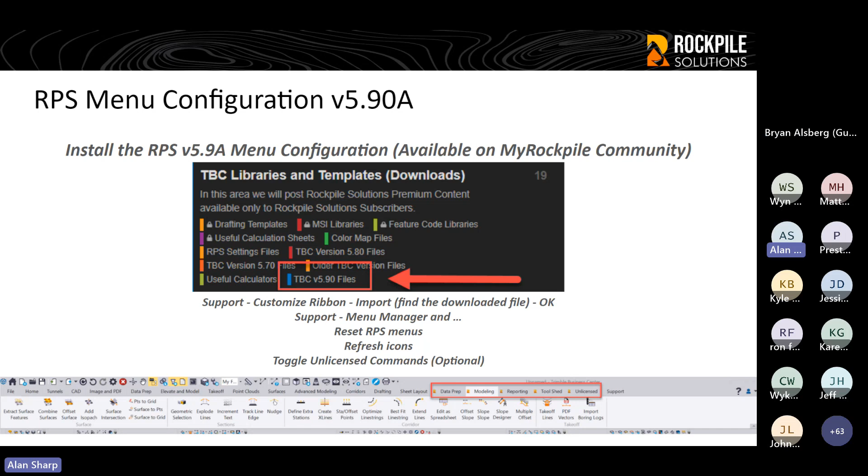So macro commands 3 folder structure, we talked about it a little bit earlier on. To solve the administrative rights issue, we created our folder structure as follows: you've got the macro commands 3 folder, then underneath that you'll find Rockpile Solutions and Trimble. And in the Rockpile Solutions folder, you'll find some system level command stuff, which is our Rockpile custom controls and utilities and shim and stuff like that, which are things that we use to control a lot of our things like our new layer control or our show direction control.

They're all centrally managed, and then all commands have access to those. So the things you find in that root folder for Rockpile Solutions are those kind of things. And in the commands folder, you'll find every single command in our library, and that's where all the TMLs are stored.

Any unlicensed commands shipped with Trimble product are in the Trimble folder. There's about 8 commands in that folder which ship out with Trimble 5.9, and we have absolutely nothing to do with that folder anymore. We've kept all of our stuff out of there.

As part of this release, we've done a bit of refactoring of naming of commands to make sure it's clearer that there are commands. We've made sure that icons, help, and support are all linked to the right command names. So there's been quite a lot of cleanup done in this process to get more consistency into our package, which sets us up for the future.

So macro commands that RPS develops and supports are in the Rockpile Solutions folder. If Trimble isn't shipping a version of a command, the command will be in our folder. If Trimble decides to ship a version of the command, then we make a Rockpile version of that, which has all our benefits on it. We make it separate to Trimble, and we'll continue to support our version, but we'll no longer support the Trimble version when Trimble decides to ship it with the product. We can't control what they do on that side at all, so we're letting them take care of that piece of it as they need to.

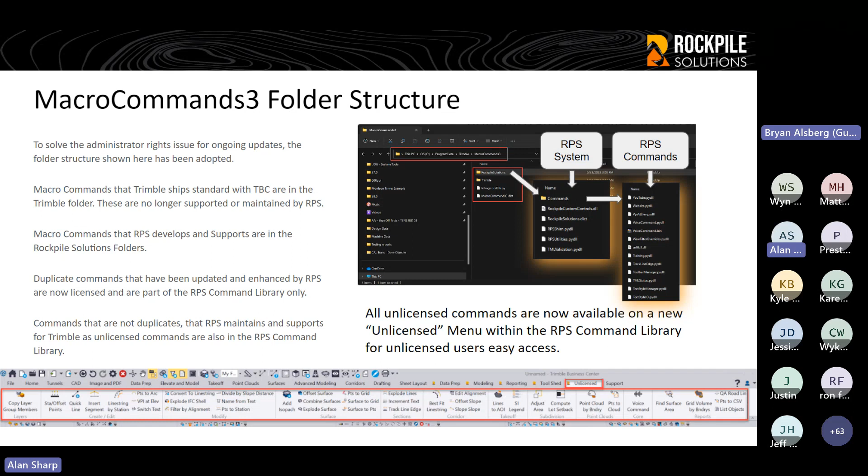So, RPS menu configuration for TBC 5.9, updated commands. We updated all the commands on the menus. We further reduced duplication of commands on different menus to make the workflows a little clearer. We've restructured the menus for some improved workflows and process steps, and we've integrated all of the new RPS and new Trimble commands into those menus.

RPS menus are now on 4 menus, plus the unlicensed commands for unlicensed users. We have a reporting menu for drafting, reporting, and exports, which is nice because now you go to that tab for that process step in the process. And toolshed is now really system tools, special applications like point piling, point clouds, etc. This reorganization gives us a decent amount of room for future development and adding more commands, which you'll start to see shortly. We've got a whole bunch of commands in the pipeline that will be released over the next 6 to 8 weeks.

We have a real continued focus on main construction workflow process steps. So we're still pushing along this image and PDF, data prep, elevate and model, takeoff, reports and drafting kind of process that is really helping people to learn how to use TBC to get takeoffs and data prep done. The market is really growing on the estimating side, especially for us, and we're finding that more and more companies are adopting TBC as a result of this change we've been making, which is helping people learn and get up to speed quicker.

We still continue to focus on this left to right process, so left to right for menus and left to right within a menu, to make it easy for people to understand that I start over here and move to the right. That's how I understand which commands I should be using when I'm doing it. And that's now supplemented with the header bar commands, which say, when I'm running this command, what else might I want to use? So if you're running a command, the header commands will give you an idea of what other things you might want to do if you're in a specific type of process.

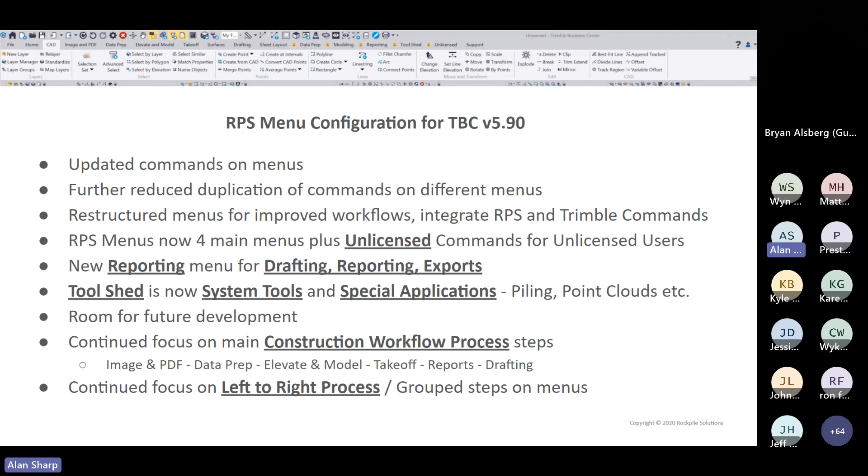So if you're running a command, in this case we're showing the define extra stations command, you may need other commands to do it. Things like creating an alignment, editing alignment labels, building a corridor, those kind of commands are all things you're likely to want to do if you're going to use the define extra stations command. So we put them in the header.

Within the commands, we've continued to rationalize the show direction and the highlighting of things. So if you're making selections, the highlights will be improved. You've always got the F1 key to access help, and you've always got the command tips at the bottom of the screen. In there, you always have a help tip as the first one, so F1 or click here to get command help.

If there's anything that might be useful to you while you're in this command, like if you hit V for vector snaps on and off, or you hit N for new line in some commands, anything like hotkeys and little tips will be put into those command tips area to help you get a bit of quick support. But if you want detailed support, press one of the help methods, the question mark, the F1 key, or the blue text at the bottom of the screen, and that will take you to the help page on our community. There you'll find full documentation and a video of the command in use, so you can actually learn how to use it. All these things have been changed, and every single command that has a command pane dialog will now have that structure.

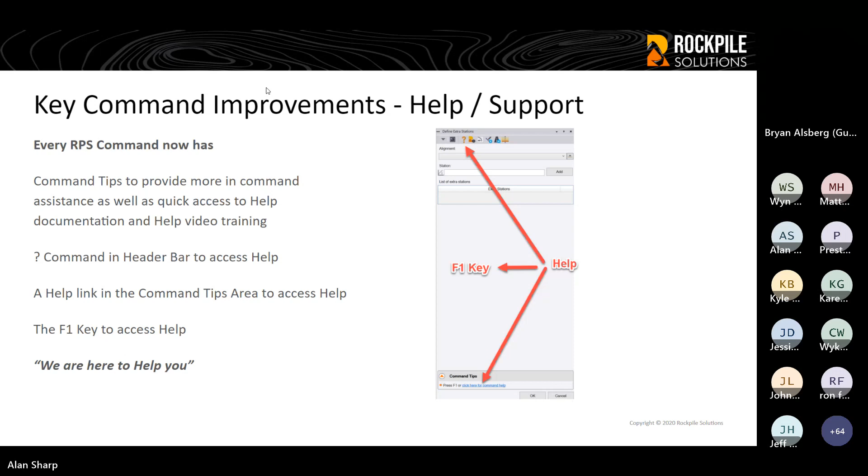As I say, our experience isn't the same as yours. So you may find that it would be nice if you could add a command, like project cleanup, to the header, because you're always having to find that command. So just let us know.

It's easy for me now to go in and change a spreadsheet, and when we build the software next time, that spreadsheet drives what goes into the headers. Peter's been building a methodology so it's really easy for us to change the header bar commands and update them when we build a new version for a release. So this is a big improvement.

While we say we're using a spreadsheet, that's just how I log in and put the data in. Peter just reads that spreadsheet per command and loads the header commands into the code automatically. So it's easy for me to manage for you, and Peter can build the library of commands very quickly as a result. It's a nice change.

This is one of the things that differentiates what we're doing compared to anybody else writing TMLs out there, is that we're trying to build a commercial system that allows us to build product quickly, manage it properly, and give you tested, documented, QA'd commands that we know work in both versions of TBC. It's hard to do this kind of work, and you need system level programmers like Peter and Wyn on my team to take care of it. The guys are doing a phenomenal job.

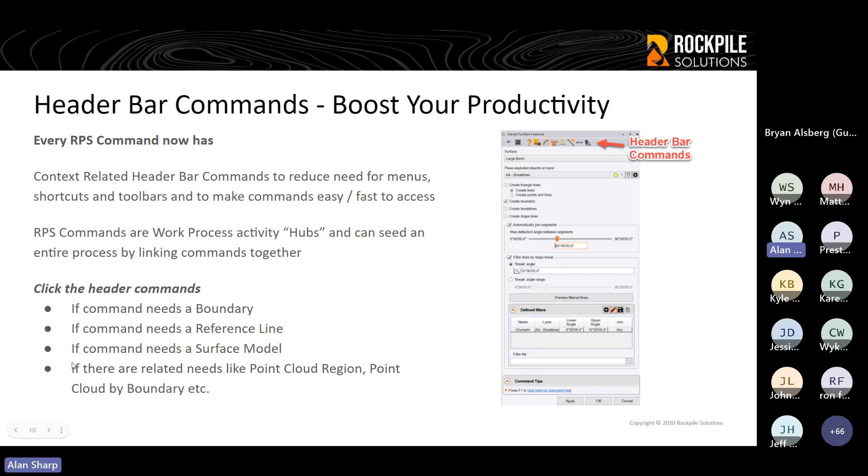Command enhancements. So we've made a lot of changes to commands while we've been doing open heart surgery on all of them.

In the past, we had a lot of early commands that were TMLs written by Trimble that weren't necessarily used so heavily, but when you try to use them, they execute once and close. A good example is the point cloud by boundary command. You might have a site limits boundary and two exclusion areas in the model, and you had to run the command three times to get it to do what you wanted.

Now we've made it so it only runs once and stays open until you close it. That just means you can do everything you want before you close it, and there were quite a few commands like that. So we changed all of them to execute and stay open, and then you close them when you're done, as opposed to execute and close, execute and close, execute and close, which is what was happening with a few of the commands before. Simple changes like that just make your life easier.

Command dialogues have been restructured for improved workflow and consistency. We found inconsistencies in the way we said things. There were some command dialogues that weren't laid out quite right, and some where the flow just wasn't right.

A good example is radial points. If you create polar rectangular coordinates, you'd click on a location - that was the first thing it asked you for, where do you want to put this. As soon as you clicked on that, if you'd already set up the settings, it would just drop it on the screen. That was too early, because you had to put in the settings afterwards. So we reorganized it so it now flows from top to bottom, and when you get to the bottom it creates the object and moves back up in the list to where it needs to be for the next round of placement. The flow just works a lot better.

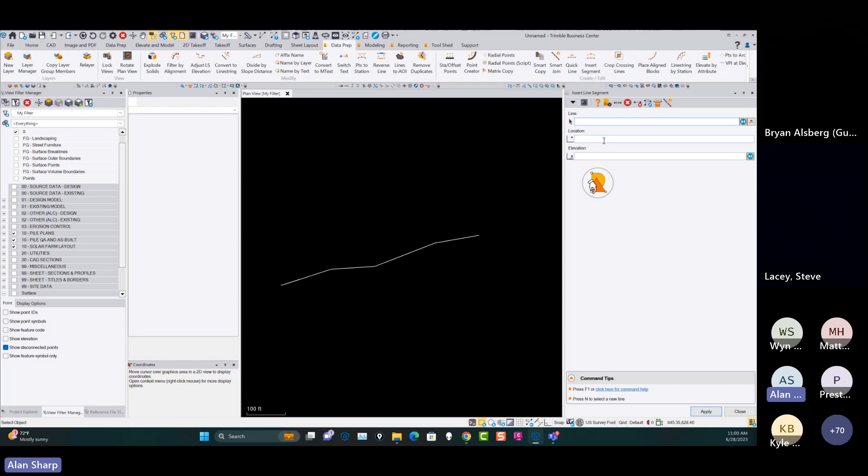If you want to go in and add segments to this line, you can grab the line itself, and when you do that, you can add segments to the end, add segments to the other end, or go in here and add segments in the middle of a segment. And if you make a mistake, you can go to rock grips, grab those, move them into position, and then go back into editing.

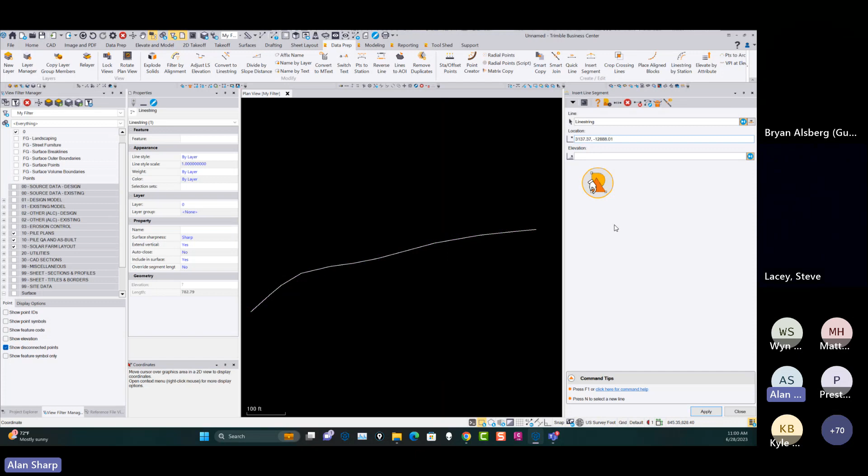So this is like turning this in, but now if I want to break that line, I can hit break, go here, close that command, and I'm back to inserting line segment on this one right here. I can just start clicking and carry on. So the beauty of these is that it's not another command on a different menu - these things you hook up, the line is carried into the command that's being executed.

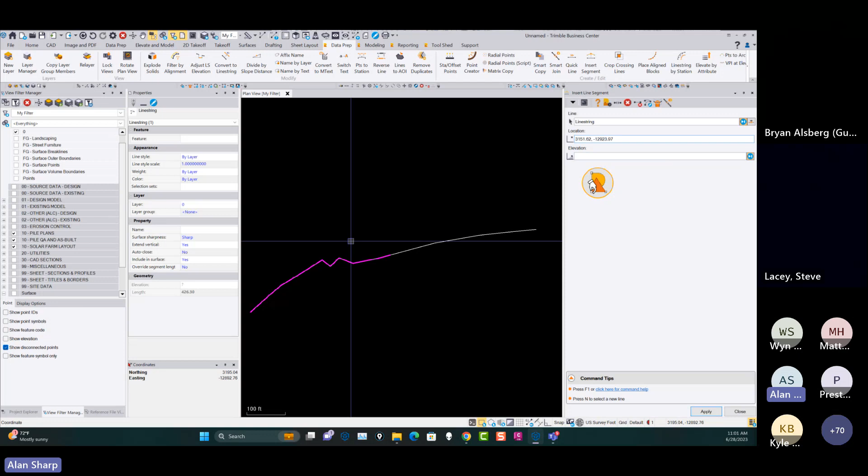You can make the change, and then come back and carry on, or you can jump into rock grips and start editing and modifying the line as you see fit to get it to match up. When you're digitizing, it's inevitable that you'll make mistakes, but these kinds of tools allow you to really fix up line work quickly, just by using simple commands in here without having to close the command just to get to the grips to move things, then come back into the command to continue what you were doing.

So this is where the header bar commands really come into fruition. If I go to things like station offset points, what else might you want to do while you're doing station offset points? You might want to offset a line, use multi-offset line, create points, create radial points, etc., because this is a point creating tool.

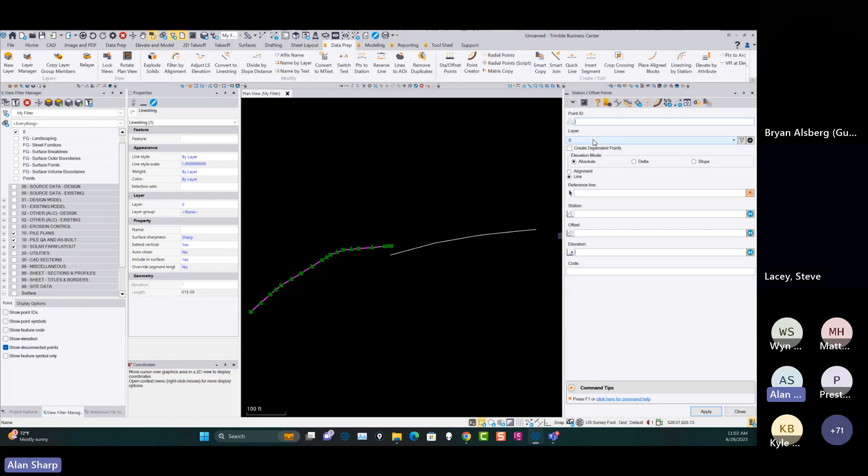So all the point creating tools are in the header bar here, which makes it easy to get access to them. So while it may look like a small change, this is where production really starts. You get the ability to jump around, jump to a command, and when you're done, close that command, you're back where you left off. You can then go into other functions if you need to, so one point creation function gives you access to all of the other point creation functions you might need.

When you do things like point cloud processor - if I go to the toolshed menu and pick up point cloud processor and run that command - the header bar commands give you things you might need, like drawing a boundary so you can add an inclusion or exclusion area. So you've got the takeoff lines and the boundary function here. You might need to sample region, so you can use the sample point cloud region function. You might need to create a point cloud boundary, so you can run the point cloud boundary. If you want to add a region or create to a region, you can do that. If you want to use keep in and keep out, or add contours, you can do all of that too.

So everything is within this command and within the header, so that while I'm doing this, if there's something I need to do, I can execute it from here and then come back and carry on, rather than going - okay, which menu is that on? I go over here and change that, then come back over here to this menu. It saves you a lot of time and effort just by knowing that the header commands are context related and they should all be in the header bar.

As I say, if you find that every time you run this command and you look up here for a command and it's not there, and you feel like it should be, just let us know, because it takes me 2 minutes to add it to the spreadsheet. That means next time we build that command, that header bar could be improved or added to as you see fit. Now, we don't want to change the main structure of this, but if somebody says, I never use that one, can we take it away? We might do a poll on that and see whether that's true, or decide whether we think you're right or wrong. But if you say, let's add something to that menu - as long as we're not going to stretch this to 100 commands and everything becomes a menu, try to limit this to less than 10 commands, because too many makes it too difficult. But 10 commands or less that are context related is something we think is extremely usable.

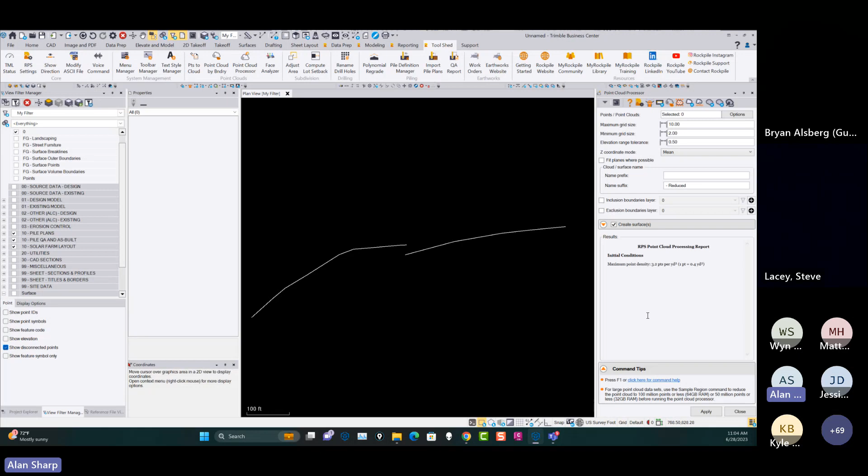So what else has changed within here? We talked about highlighting and things like that. Let me just start a new project here a minute, and I'm going to bring in something to show you crop crossing to give you an example of how highlighting has been improved.

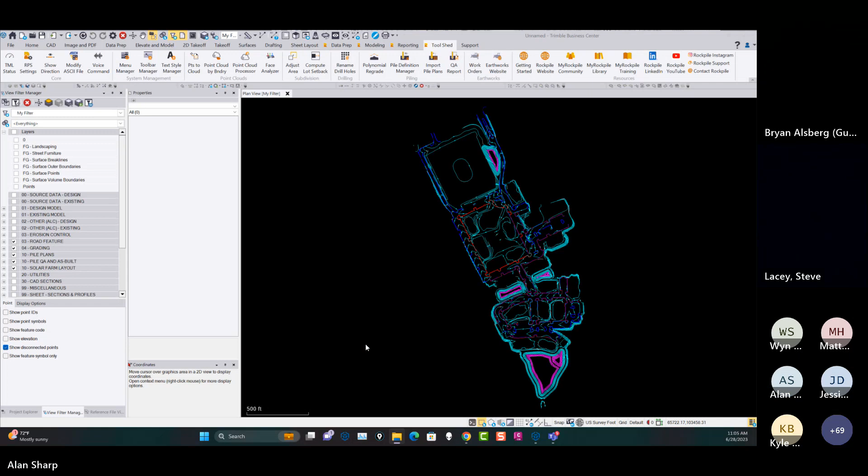So if I just go to... this will show both the improvements to crop crossing, but also how highlighting has been improved here. So within this is an example of a job where you've got lots of curb and gutter lines, and you've got contours, and you want to crop the contours between the two lines.

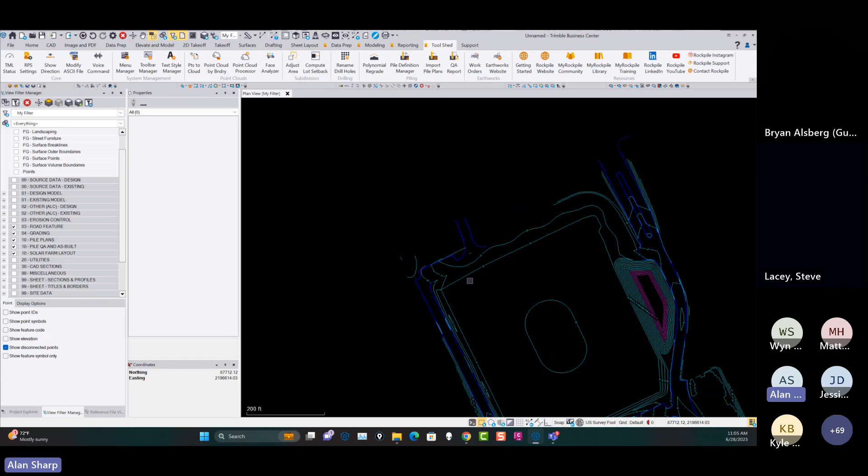When we first wrote this command, the two-line mode worked maybe a little bit better than it has been more recently. I'm not sure when it got changed and why. But when we started looking into it, the code just wouldn't have done things correctly, especially with things like closed lines, or in this case, in this particular job. This is a data set I got from a customer, and he said it's absolutely horrible on this.

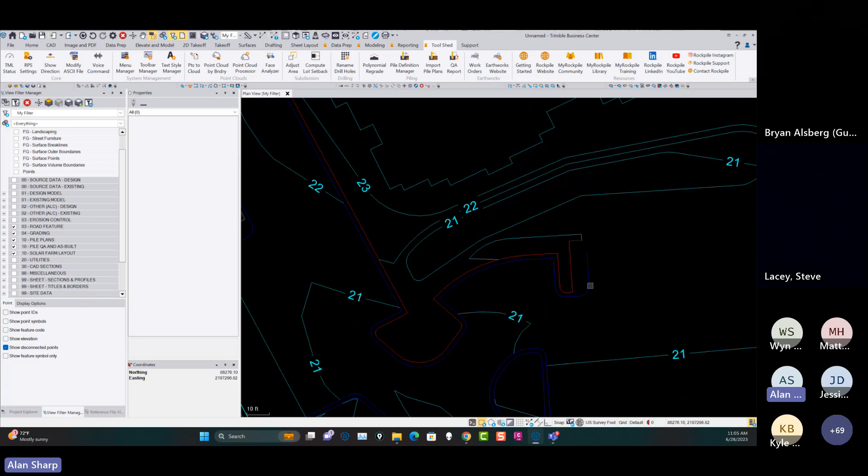You can see this line comes around, and then it's not parallel with this one, and it finishes beyond the end of this one, and it just didn't work at all in those situations. So they asked us to look at, could we rework it to make it, again, more usable?

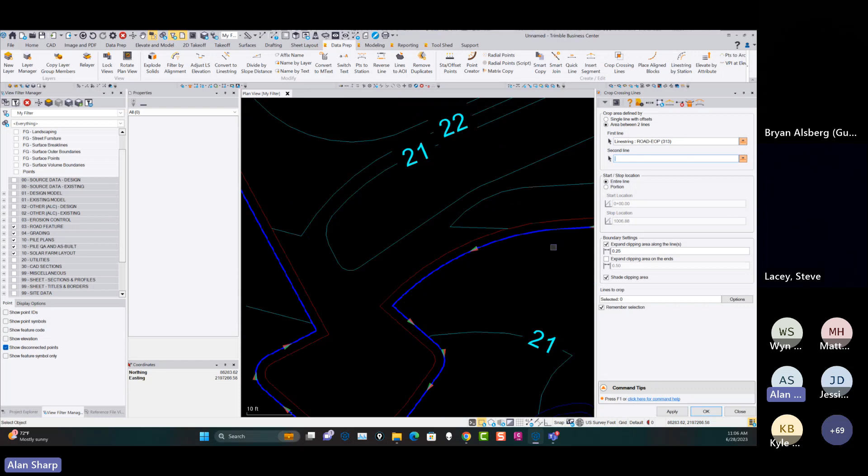So if you go to data prep now and you go to crop crossing, and if we pick some of these lines, we've made some improvements into the area between two lines mode. And in this case, I'm using the entire line. And so if I go in here and say, pick line 1, it highlights correctly. Pick line 2, it highlights. And then the secondary highlight is now used in between.

Now, the way we handle non-parallel lines is we look for the end of one line, look for the nearest end of the other line, and we close it out to make a closed area in that situation. And that applies on both ends here. In this case, this was a closed end. You can see it joins across the end here to give you a thing. But this point is right here.

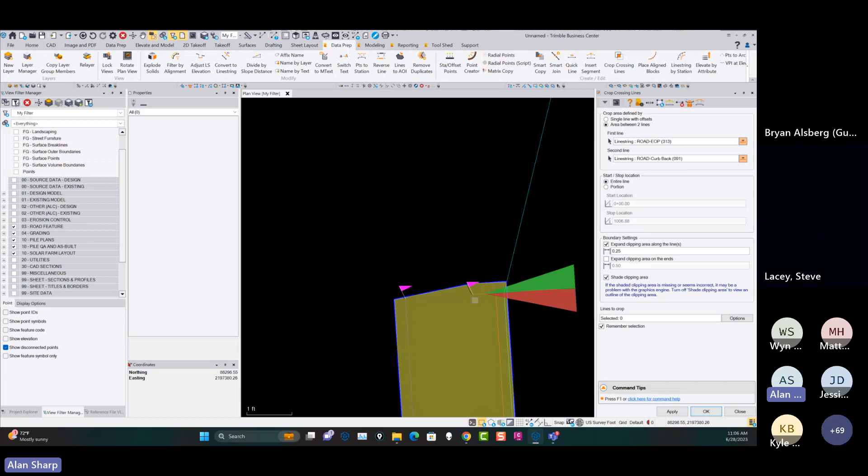We have this expansion area, which allows you to expand left and right of the selected lines so that you get a bigger clipping area. And then you can just go down here, pick the contours that you want to crop out by layer. So you just click on the layer that you want, close out, and now you hit apply. At that point, now it's cropped all those lines to that, and you're ready to go to the next one.

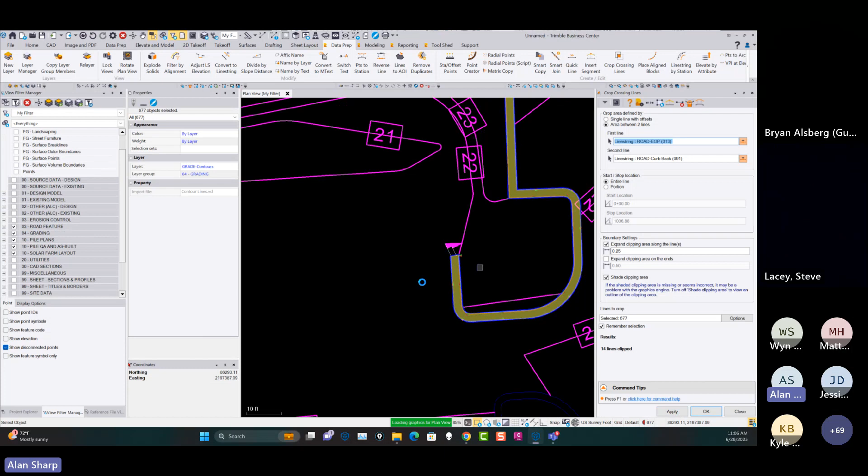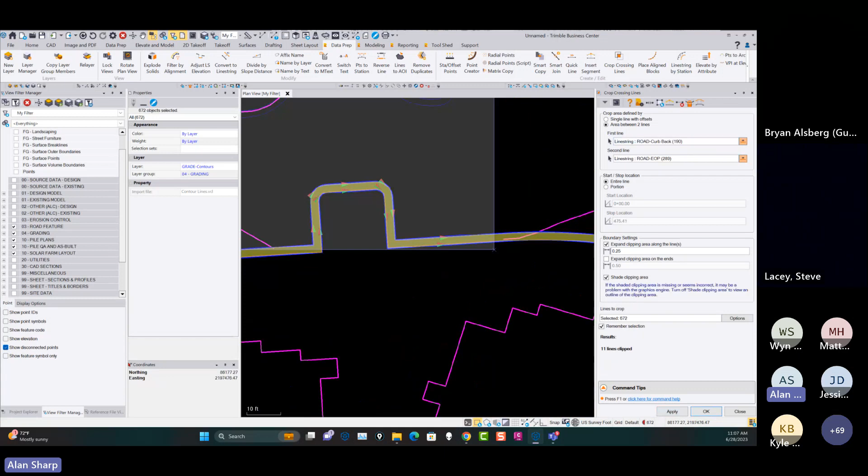So you pick line 1, line 2, and now it's ready to crop, and you hit apply, and then you go to the next one. And so this is a much faster workflow now than it was before. You just hit apply each time or enter, and now it's cropping the contours within those curb and gutter lines, and you can run through a data set much quicker now than you could before, and the highlighting is working much better as a result.

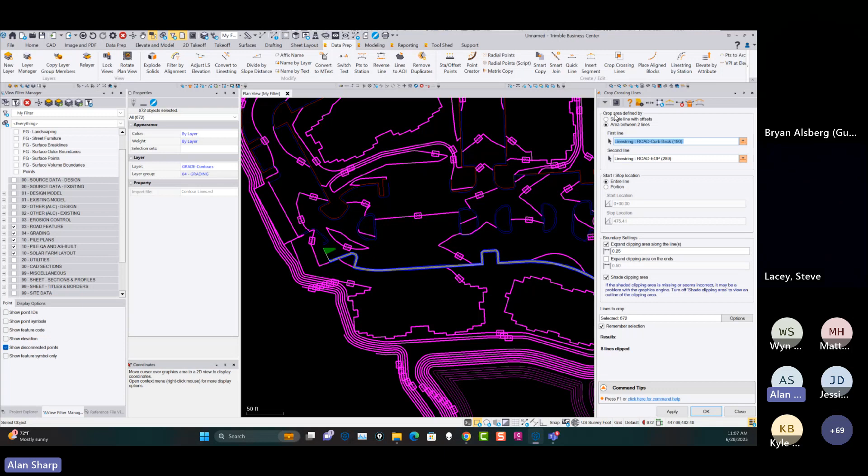So that kind of command, the highlighting is an important factor. The workflow within the dialog was improved and refined, and we fixed some issues with the two-line mode specifically. But if you're looking at like single line mode, and let's say we run that in portion mode, then this works in the same way.

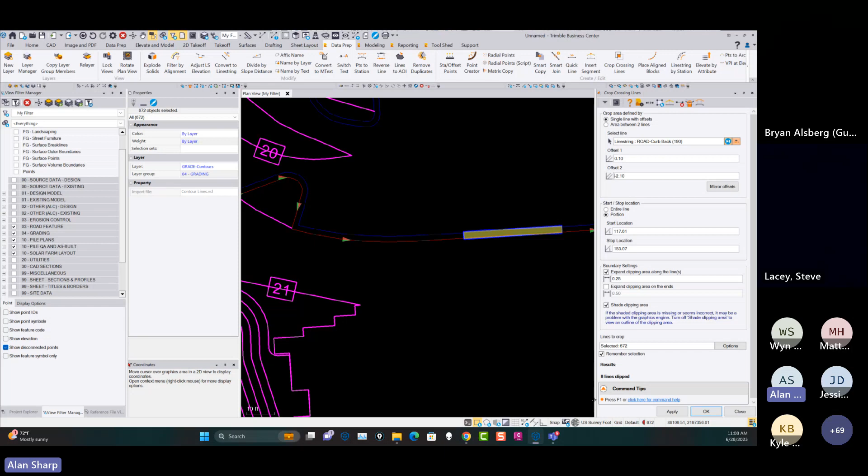So again, this just didn't work well from a highlighting perspective in the previous releases. Now it works a lot nicer, so you can see exactly what you're doing as you're working through the system. And again, you've got the header bar commands to jump to things you want, and you've got the help down here and the help up here, and you've got command tips that give you additional information should it be relevant. So just things like that make a massive difference to workflows.

If we look at things like slip form paving workflow, if I just start another new project here and take a look at that.

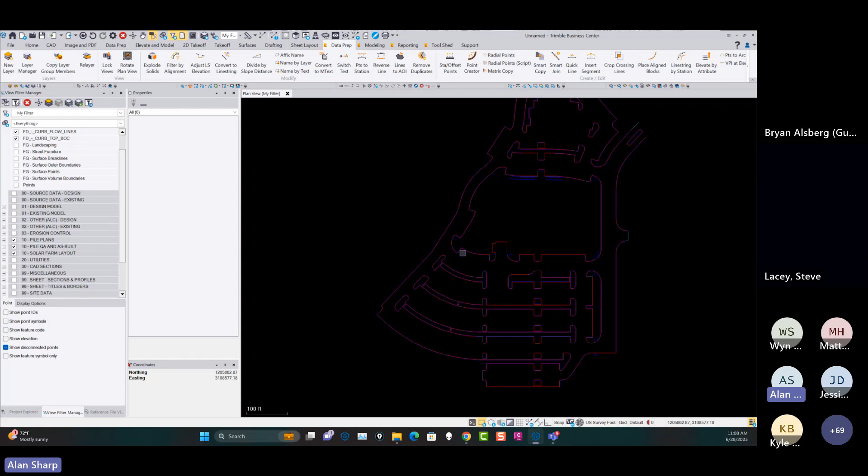If I go to slip form paving, I'm going to pick up a data set, which is the Trimble building that was built when I was there. Here we've got the parking lot information. So if I just pick the curb lines for this and isolate or view only that layer, I've got just that layer visible.

So our slip form paving workflow starts at the optimize line string function. If I go in here, optimize line string, now you'll see that in this workflow, in this command, the header bar commands...

Come on. Just give me a second here. For some reason, the server's taking a long time to respond.

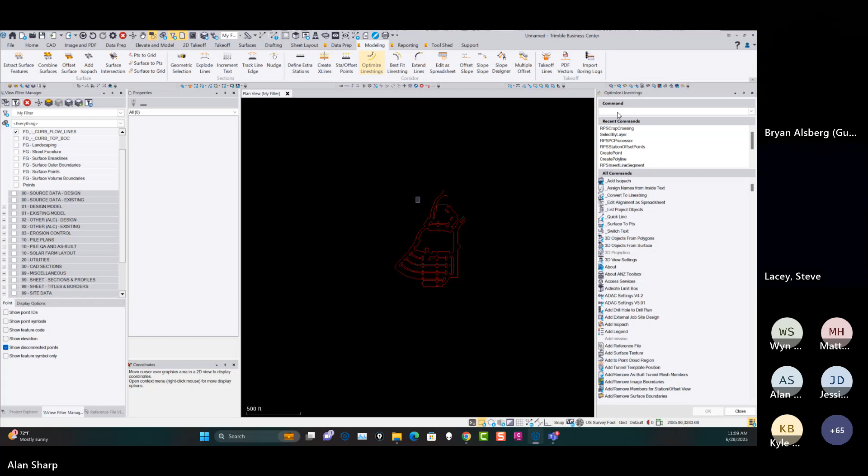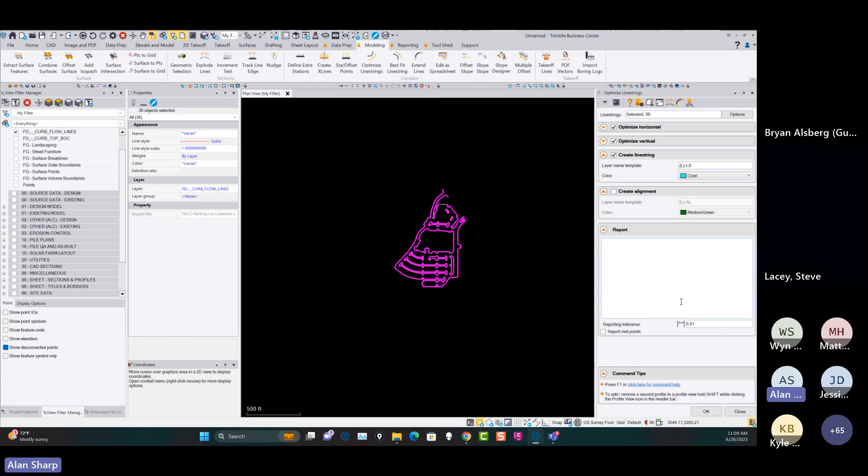There we go. Okay, so now if I go in here and I say, we start off with pick all the lines that we want to optimize, set our optimization parameters. These are now in RPS settings, so that you can now set these centrally and use them in all commands that need optimization. You can say I want to create line strings or alignments in the normal way, and then we can hit the OK button, and that will create me the layer of optimized lines.

So if I go into, once it's done this now, it's just finishing up here.

It's just taking more. Time for a new computer. No, something going on with the server on the back end, I think. I hope.

I'm just going to start another version of TBC just in case I need one. It's coming back now, I think. Here we go, it's come back now.

Okay, so now it created me these optimized lines on this layer, right? So I can turn off the original. These are the optimized lines. And so things like if I click on this line right here, let's just leave these two lines on a minute.

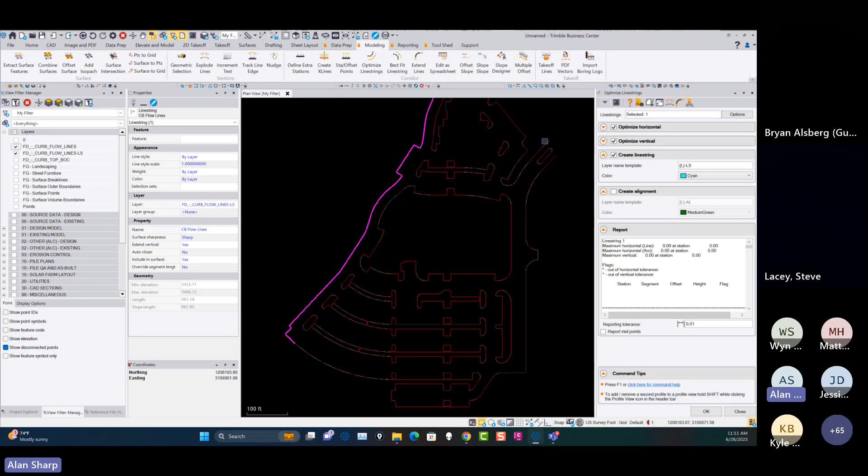If I click on the optimized line and I hit the profile viewer button, that lets me see the profile through that line. If I click on the unoptimized line and hold the shift key down and click on this button, now I can see the profiles of both lines at the same time. So here's the optimized line, here's the unoptimized line. You can see the difference it made all the way along the process.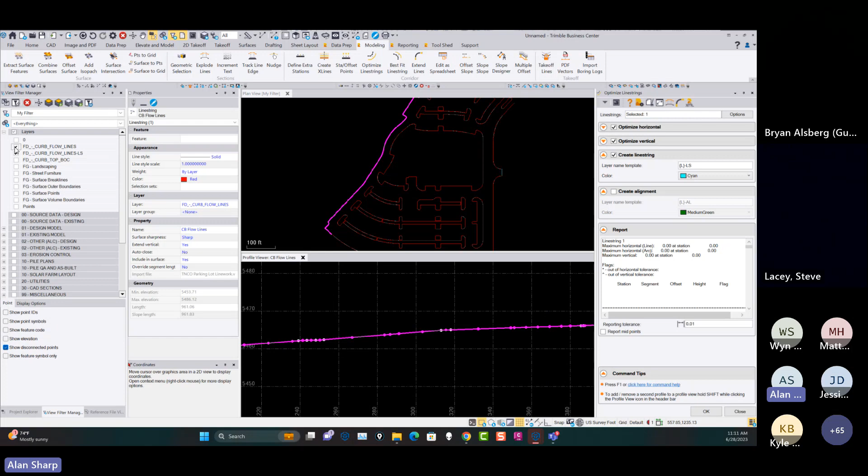So again, from the header bar commands, if there were duplicate lines, I could use the project cleanup to remove duplicates. If I want to go in and explode the lines, which is the next step in the workflow, I can turn off the source line, close out my profile viewer, and click on the next button in the process, which is explode. I can then say pick all these lines that I just created and explode them. And now they're all individual segments of lines.

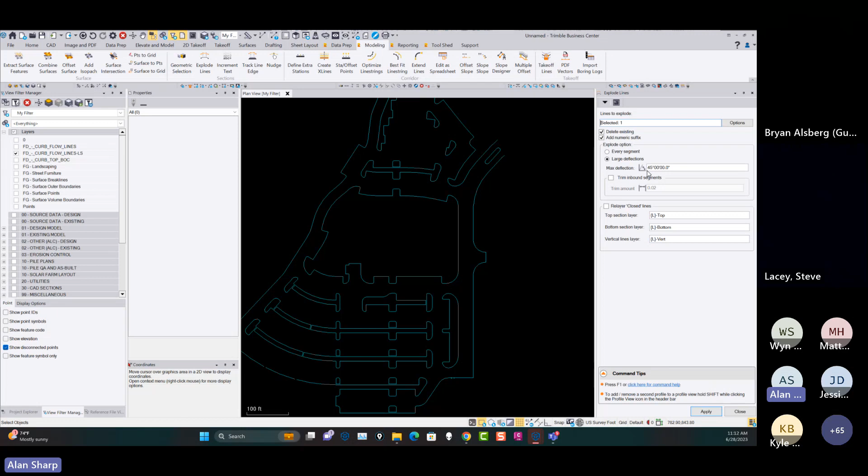You can see they're broken at all the right points for the paver. So now I've done the exploding. The next step of the line is to extend the line. So I can run extend. And now I can pick all the lines that I want to extend, set my parameters and hit apply. And now I've extended them.

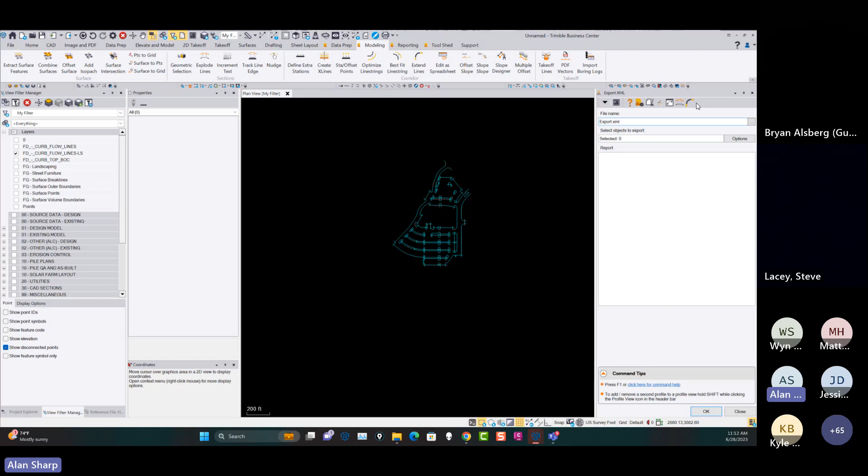The last process step is I want to go to XML. So the 4 commands all have the same headers in the same position. So when you move from step 1 to step 2 to step 3 to step 4, all you need to do is hit the next button in the sequence on the header bar to take you to that point. So now I can export them to XML, pick the lines in here.

And at that point, now I can say, okay, export those to XML, and they would go out to my XML file. So again, looking at the way the header bars integrate with the process, if you get the right header bar commands for the right command, then it's easy to move quickly through the process without having to remember that some of the buttons are on this menu and some of them are on this menu and some of them are on this menu over here. Now you just run step 1, 2, 3, 4 through the menu and you're done.

And if there's other things you need along the way, like project cleanup, then we put that on there too, so that it's easy for you to manage it. So that's like the header bar commands functionality in here.

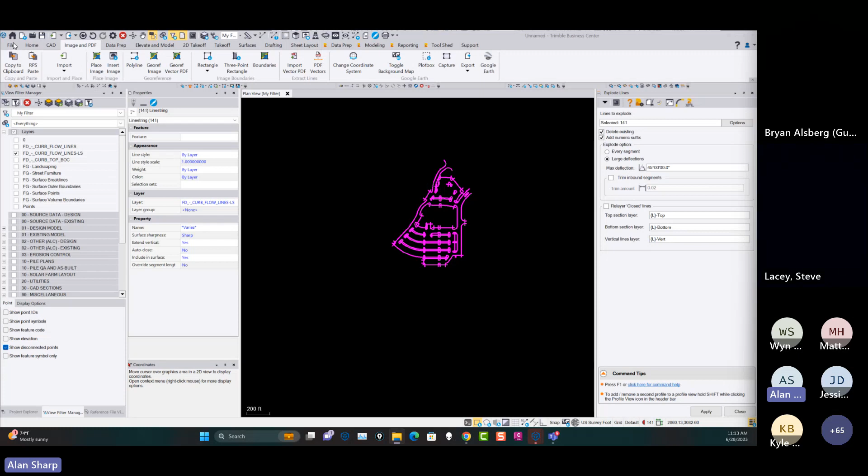If we do things like point cloud processor, just as another example, just to kind of show that. So if I go to File New here and say OK. And in here, if I bring in a point cloud file, this is a reservoir project here in Colorado. This is about 25 million points or something like that. So that takes a few seconds to load.

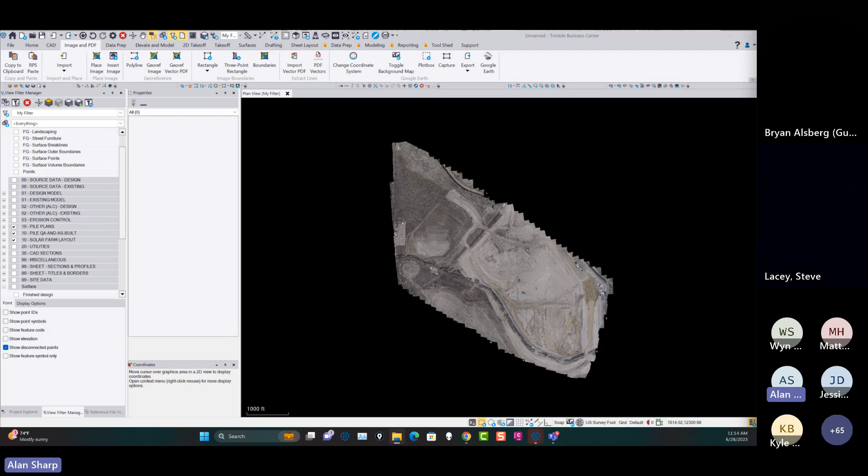Okay, so then if I bring in some exclusion areas in a site limits file. My green line around the outside is my site limits. The red areas could be exclusion areas for some reason. This is just a demonstration, it isn't real, but the purpose is to show you the way we're thinking here.

If you're in the Tool Shed menu and you run point cloud processor, if I needed to create those boundaries, the boundary and takeoff lines are up here in the header, so I can draw these while I'm in the command from these header bars.

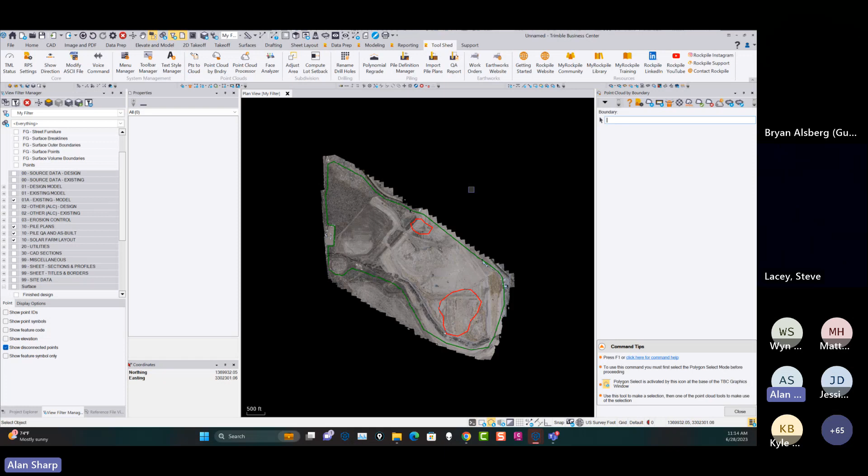If I need to use the point cloud by boundary command to limit the point cloud to just this area, I can run the point cloud by boundary command while I'm here, pick the limits boundary right here, and that will highlight the area of the data for that site limits.

And now what's the next step? I need to create a region. So I go to the create region command, which is back here, and I want to create this. It's called site limits, and say OK. And so now I've created my region directly while I'm in here.

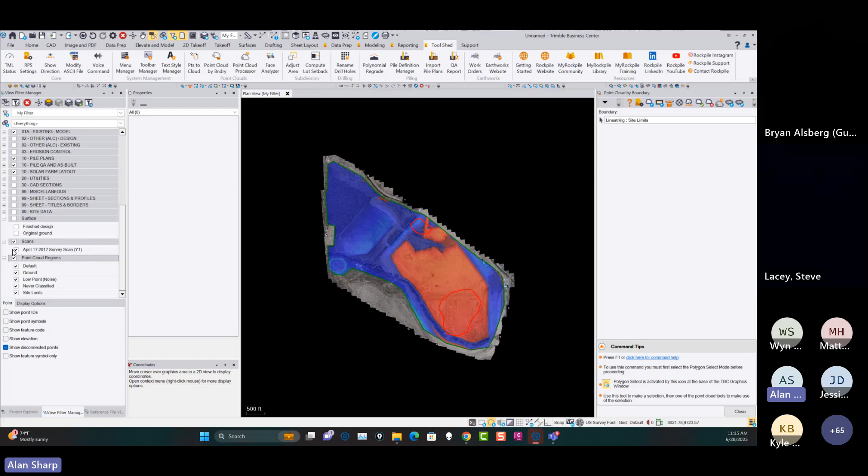So I can turn off in the point cloud regions, I can turn off everything apart from the site limits data. And that's now color coded it based on my elevation range for the job.

Now, if there's some other boundaries, the point cloud by boundary command is still running, whereas before it used to close. Now I can just say, okay, well, I want to exclude this area right here. And what do I want to do with that? Well, I want to create a region out of that.

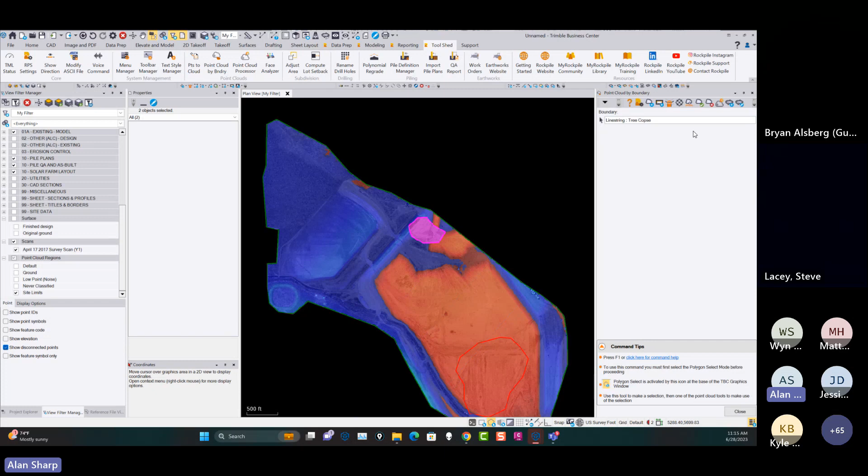So I'm going to say create a region, and I'm going to call it exclusions, and say okay. And now that's been put in the exclusions area, so I can turn the exclusions off, and that will be a hole in my model.

Same with this one over here. So again, I come back to here, click on this boundary, and I can then say that's now wetland areas, but I want to add it to a region. So I'm going to go add point region, and I'm going to set it to my exclusions area and say add. And so that point cloud data will now disappear.

Now I've got down to just the data I care about. The next thing I might want to do is, if I close out this one as well, I'm back in here. I can now say sample the point cloud region because I want to take this down from being, let's say...

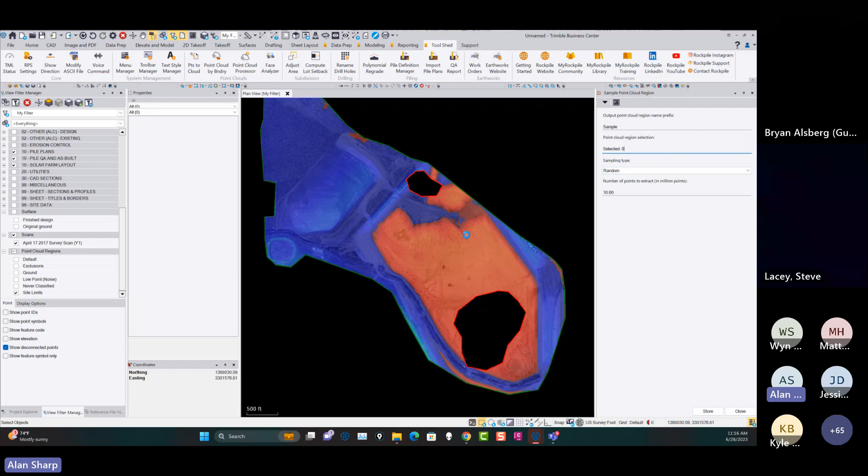I want to create an output called sample. I pick the point cloud that I want to sample, this one, and I say, well, I want 10 million points or 2 million points out of that file. So I hit store, and so now it's creating a sample of 10 million points for me of that point cloud, reducing it by a further 50%.

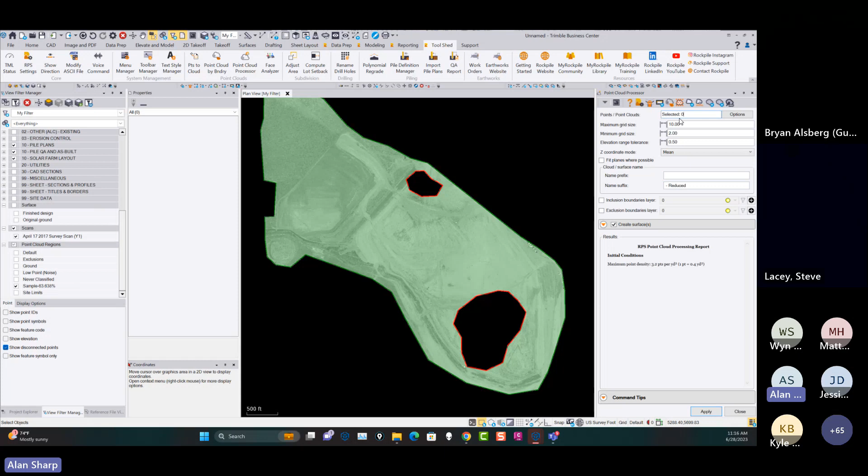So now I'm looking at my sample file. Now I can run point cloud processor on that. So again, I'm in the point cloud processor command. Now I can just pick the point cloud itself, specify my parameters that I want, and then run the point cloud processor to reduce this down to what I'm looking for.

So again, by putting these headers up here, I just took the highlights out of the point cloud menu and put them in here because those are the functions that I use every time I do this process. And now I can just run along the header here with all the tools.

And at the end of it, when I want to build the surface model, I've got my create quick contours. I've got my create contours functionality up here because the point cloud processor builds the surface, but it doesn't build the contours. So I can add the contours here at the end of the process.

So again, I can take a point cloud, build the boundaries, reduce the point cloud, sample it, make regions as I need to, and then run the point cloud processor to reduce it and make the surface model, and I can use the contours all within one process step here. So the point cloud processor becomes a hub that seeds that whole mechanical one-step, two-step, three-step, four-step, five-step process to get you through the job quickly.

If you're a new user, just knowing that if I run this command, the other things I'm going to need are going to be in the header bar is kind of handy to learn, because you don't have to know where to find all these commands on all these other menus. You can just go into that command. Once you've learned that one, everything you need is there.

This is the process we've tried to take with every single one of the commands: what do I do while I'm in here, and how is this going to make me faster?

Things like the piling menus are the same. You start with Pile Definition Manager, and whichever command you run, the other commands are all there too in the header bar. So you can run RPS settings to get to your settings, get the Pile Definition Manager, get the piling QA report, and create surfaces, because that's a function you need while doing piling. So the header bar commands really make a difference even in that workflow.

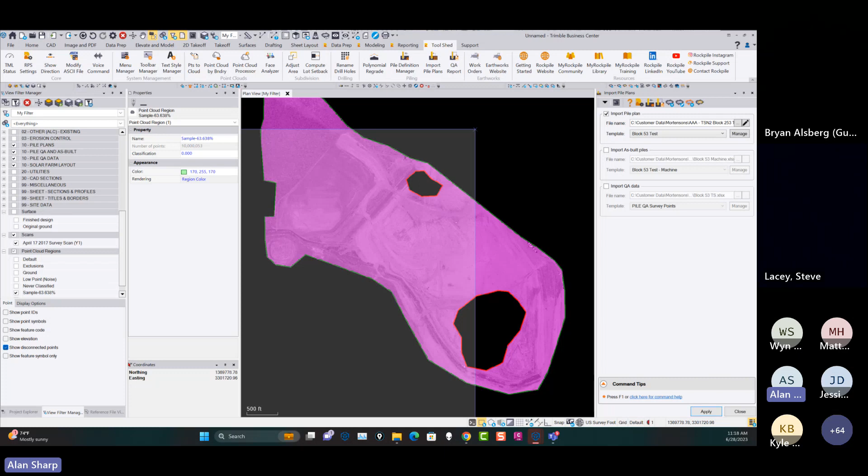In terms of other improvements, most of the changes you'll see are relatively quick, simple wins. Take radial point script, probably the best example I can show you. Maybe not a command everybody uses every day, but if you have a set of radial points for a circular gas container or a circular building, where you've got points by polar rectangular coordinates...

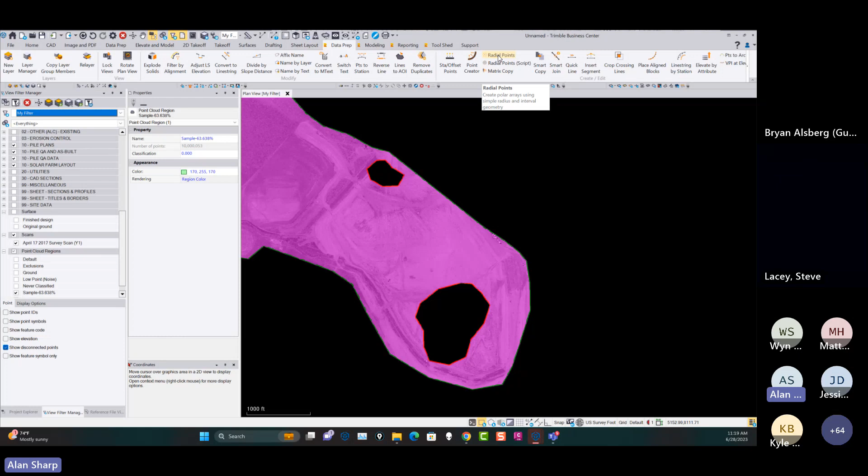If you run radial points - before, when we did this, it asks you for the point ID, it asks you for the code. Before, it used to ask you those at the end, after the data creation piece was created.

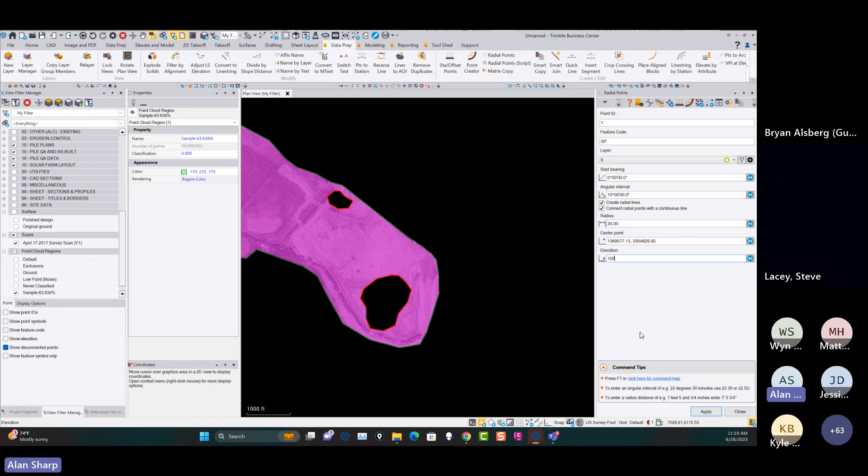Now it asks what layer you want to put it on, what bearing you want to start it at, what angular interval you want - say 10 degrees - and whether you want to create the radial lines and radial points connected around the outside radius. What radius do you want? Let's say 10 feet - let's do 20 feet here. Where's the center point, right here? And what elevation did you want? 100. Now when I hit enter, it will create that.

If I hit apply there and look at layer 0, it creates that object directly. Now it jumps you back in the sequence to what you want to do next, so depending on these settings on these buttons, you could turn them on and off.

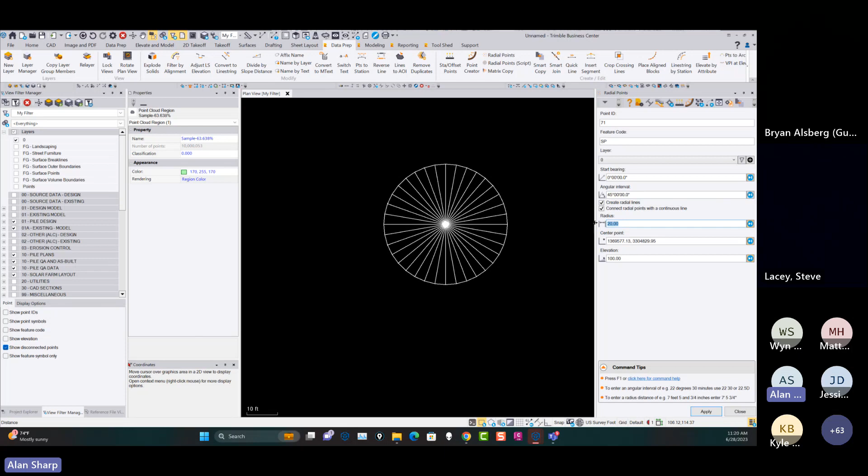So you could say, okay, the next one I want to do is 45 degrees, and in this case a radius of 30, with the center point in the same place. Now it's created the next one, because I've got sticky buttons set on these. So as you run through this, depending on what sticky buttons you have, the cycling is fully automatic - you can make really fast changes, but it doesn't execute until you get to the bottom of that list of functions.

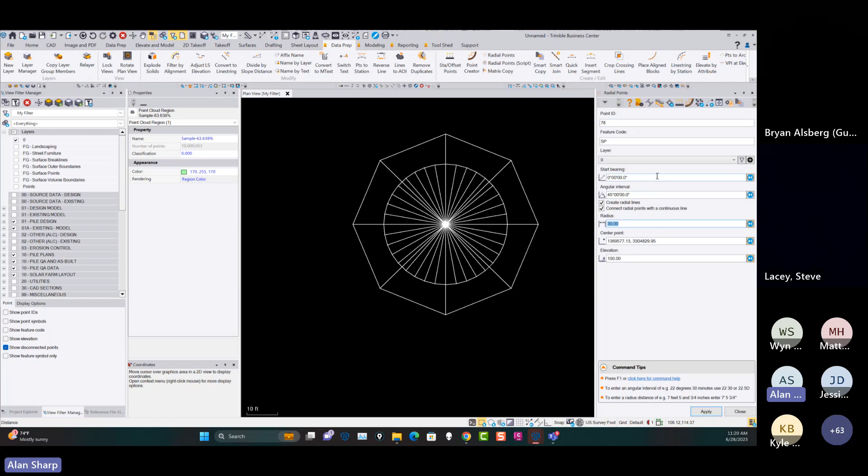So now this is much faster and easier to use, because the cycling within the dialog is much more logical. And because we changed it here, we put all the header bars for point creation up here too, so you can use this command and get to all the other point creation functions you might want.

We made the same exact changes to the point script function, where you use scripting to build it, but the way we apply the scripting is built the same way with the same sequence at the bottom. So again, just rationalization and refinement, because these two commands were written at two different times - they weren't 100% consistent with each other, let alone within the system. Now they are, and now they flow much better.

Production comes from a bit of a speed improvement in terms of ease of use and flow of the dialogue. You'll find that pretty much everywhere within the commands that got touched. Hopefully you like all these changes. There's too many to go through one at a time, but be aware that if you're in a command, you might find it slightly differently laid out, or maybe completely differently laid out than before, but that was done to make it faster and more streamlined in use.

I don't get a chance very often to go through and touch every single command over a period of 5 to 6 weeks, where I really get to eat our own dog food on every single command. In this case I've done that, and we've made a lot of really good changes, I think, just because we've had a chance to go back and look at what we were doing and work out if that's the best we can do, or can we improve it.

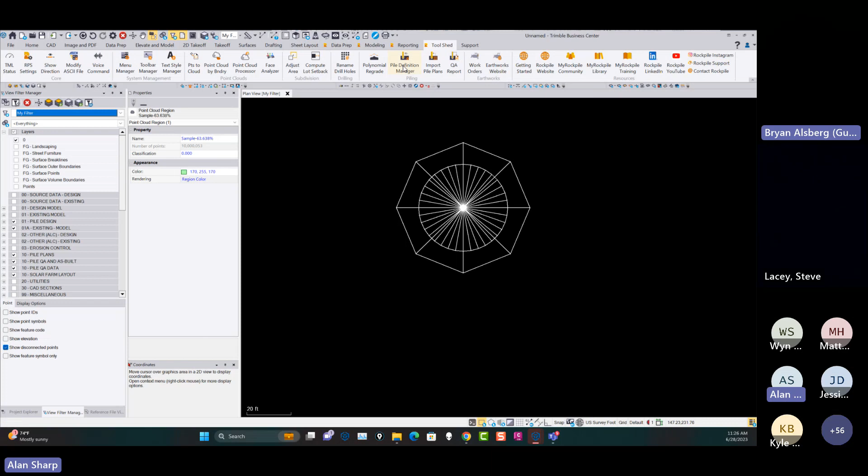It's not a big change from a usability standpoint, but when you come into modeling and go multi-offset line, with my command library or template library, the fact it will open within a second or two is a massive time saving for me, because I use this command all the time. I have dozens of different templates because I work with lots of different people. I have to clean this up regularly because I'm creating examples all the time. But this file was taking up to 2.5 minutes to open last week, and with the change we've made in the last week on this command, now it opens in a couple of seconds. That's a massive boon to production - you're not sitting there waiting for it to load. That was a coffee command before, where you went and got a cup of coffee while it started to open. Things like that make a massive difference to me as a user, and hopefully you see the benefit there as you start getting into it.